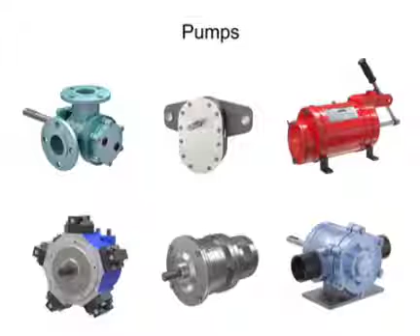Many different types of pumps exist to assist fluid movement in a variety of systems. An external gear pump uses two gears rotating against each other to provide fluid movement.

One gear is driven by a motor connected to a shaft. This is called the drive gear because it is driven by a motor, and it in turn meshes with and drives the movement of the second gear.

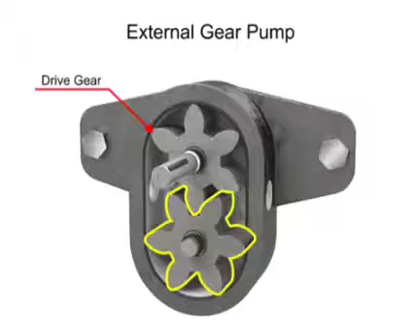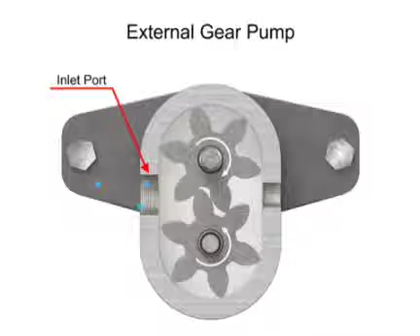As the gears rotate away from each other and come out of mesh, they create an expanding volume on the inlet side of the pump. This creates a vacuum at the inlet port, allowing fluid to flow into the pump. Then fluid flows into the cavities and is trapped by the gear teeth.

As the gears rotate, a flow path is created around the outside of each one. Fluid trapped in the slots between teeth is carried around and discharged into the cavity with the outlet port. Meshing of the teeth in the center of the pump seals the outlet port from the inlet port. No fluid passes between the gears.

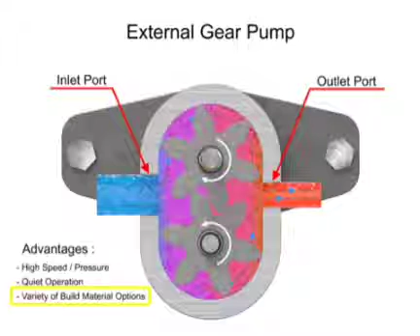The advantages of external gear pumps are their high speed and pressure, relatively quiet operation, and that their design accommodates a wide variety of materials. Disadvantages include bushings in the liquid area can become worn, and that they have fixed end clearances.

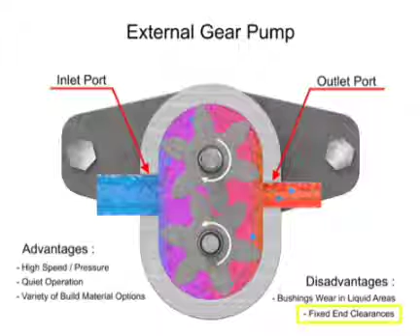Internal gear pumps are exceptionally versatile. This type of pump has one inner gear which is inside a second outer gear. The inner gear has a shaft driven by a motor and has teeth that protrude outward. The outer gear has teeth that protrude inward toward the center of the pump.

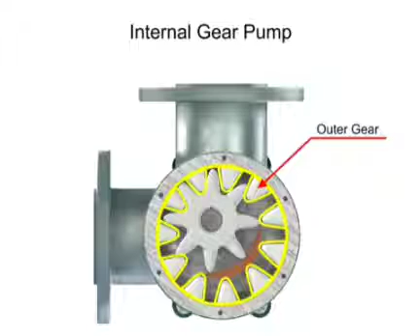As the inner gear rotates, it meshes with and moves the outer gear. Liquid is trapped in the gear spaces and carried from the inlet to the discharge. A stationary crescent-shaped divider separates the intake and discharge portions of the fluid.

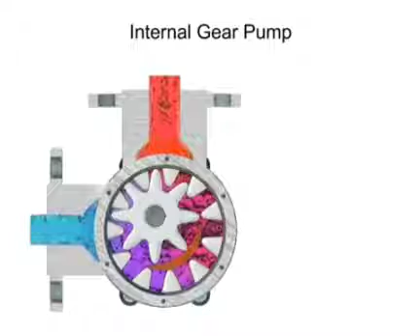Advantages of internal gear pumps are a smooth and almost pulseless flow, and slightly more horsepower for its size. Disadvantages are its higher cost, limited size range, low to moderate pressure ratings, and few sources of manufacture.

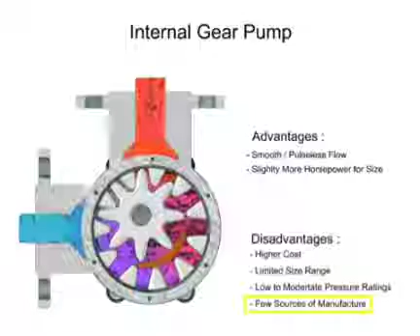A rotary vane pump is a positive displacement pump that consists of vanes mounted to a rotor. The vanes are on an off-center drive shaft. As the shaft rotates, the variable length vanes slide in and out to maintain contact with the pump housing. The tension in the vanes is maintained by either springs or hydraulic pressure.

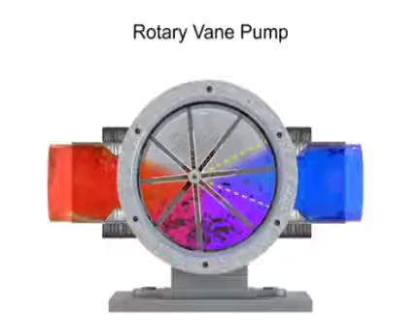As the vanes rotate, they create chambers of varying sizes within the pump. Fluid enters at the largest chamber. As the vanes rotate and retract, the chambers get smaller, forcing fluid to exit through the discharge port.

The advantages of vane pumps are that they can handle low viscosity fluids at relatively higher pressures, can dry run for short periods, and develop a good vacuum. Their disadvantages include complexity and their unsuitability for both high pressure and high viscosity fluids.

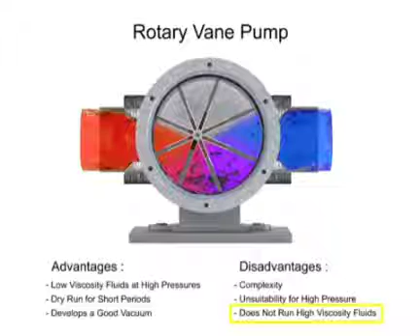Piston pumps come in many different forms. A swash plate is a device used to translate the motion of a rotating shaft into the reciprocating motion of a piston.

Swash plate piston pumps have a rotating shaft connected to a cylinder block containing pistons, which are pressed against a stationary swash plate that sits at an angle to the cylinder. As the shaft rotates, the pistons move against the swash plate, causing them to reciprocate within the piston block.

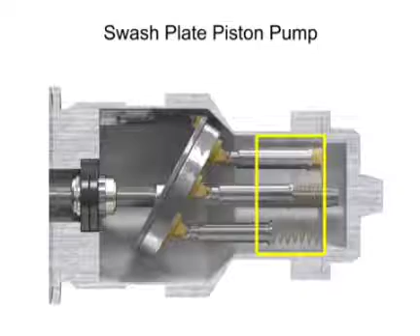The pistons create a vacuum that forces fluid in during half a revolution, and expels fluid during the other half. On the intake stroke, a spring ensures the pistons pull back and maintain contact with the swash plate, causing fluid to fill the empty cavity left behind.

On the discharge stroke, the angle of the swash plate forces the pistons back inside the piston block and discharges the fluid. The greater the slant on the swash plate, the further the pump pistons move and the more fluid they transfer.

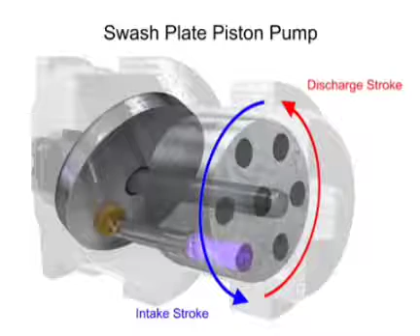Piston pumps, in general, are manufactured with closer internal fits than other pumps. This means that internal slippage can be less, so that they operate with reasonable efficiency at pressures both too high or too low for the operation of other pumps.

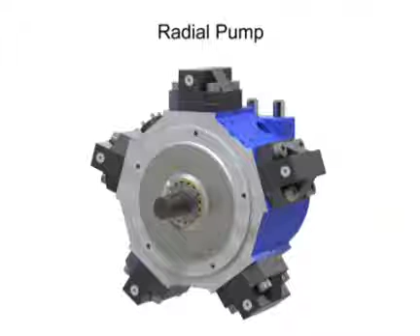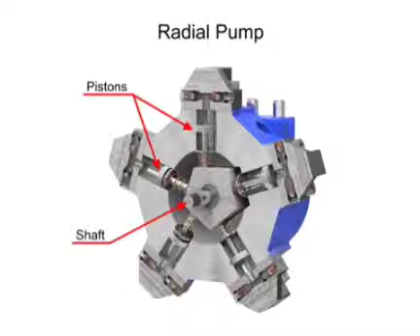Radial pumps are designed so the pistons stroke in a direction at right angles to the shaft. The pistons are arranged like wheel spokes around a cylinder block with an eccentric central cam mounted on a drive shaft.

As the shaft rotates, the cam moves towards the pistons, forcing them down into the cylinder block and discharging the fluid. As the cam moves away, springs help retract the piston and cause the intake stroke. Check valves ensure that fluid only enters the inlet ports and only exits the outlet ports.

Radial piston pumps have a low noise level, very high loads at low speeds, and high efficiency.

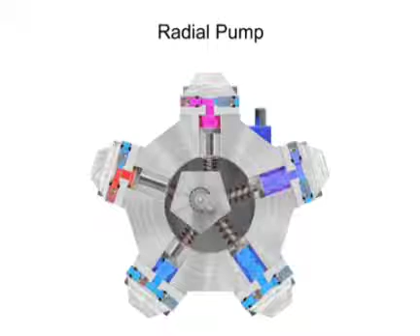Hand pumps are used when a source of power is not available, or where the extra expense of a power pump isn't warranted. For example, they are used on shop presses and other portable equipment, serve as standby pumps, and serve as sources of emergency power.

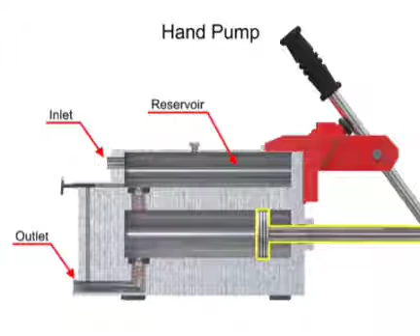Hand pumps are always of piston type and are usually constructed with a piston working between two check valves.

Double-acting hand pumps are more efficient, allowing fluid to both enter and discharge on both strokes of the piston. Moving the pump handle in either direction allows fluid to be drawn in from the reservoir and discharged via the outlet ports. Check valves in all locations prevent fluid backflow.